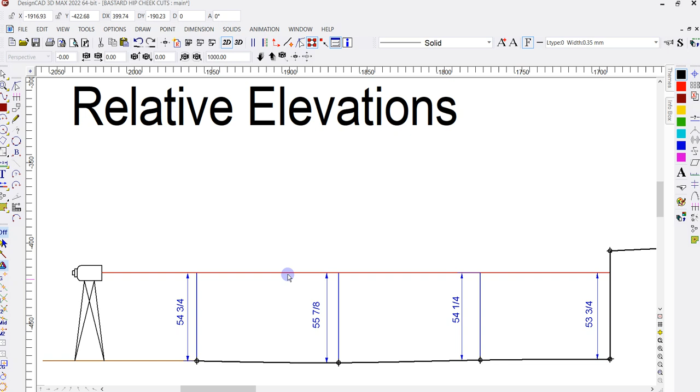And then at some point you're going to end up needing to go higher with your laser or your level. So there's the new, put your laser, the new laser, there's your new laser line.

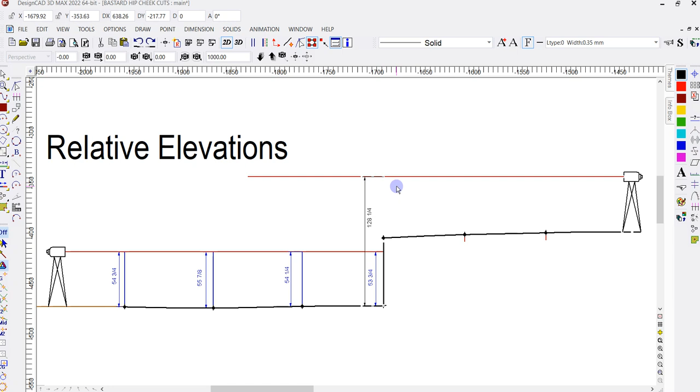So now what you need to do is tie in these points to these points, right? So what you're going to do is tie in the old laser elevation or this old point to the new laser line. So you're going to start measuring this one here. I should have left that line, but the 128.

So you're going to go from the new laser line all the way up. So now you've tied the new laser line into the old point.

So if you do the math, 128 and a quarter minus 53 and 3/4 will give you 74 and a half. And you want to tie that into another existing dimension and get that same number. That's how you're going to check to make sure you're not making a blunder.

And then pretty much it's rest. You just start taking those elevations as you go. And then you have relative, so all the points, you can look at the points relative to each other.

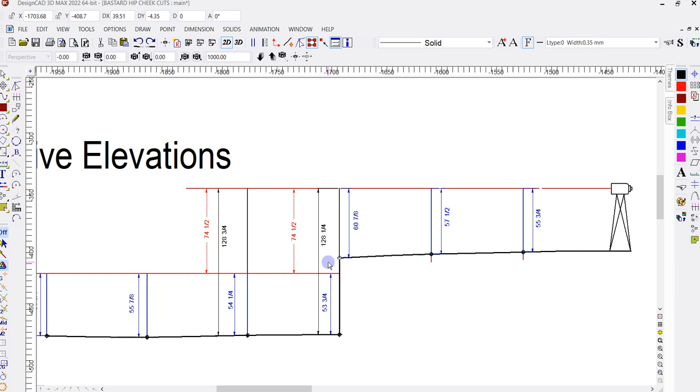This is easy to take back and draw or give to your detailer. But probably the most important thing here is getting those two numbers so that you don't make a mistake. And then that's about it.

So now that you have everything, these are relative to each other. And if you go up to 128 and a quarter minus the 60 and 7/8, that'll give you this dimension right here.

Right? So now you have relative from the lowest dimensions to the highest dimensions. So if you wanted to draw the lower level and then raise yourself up, then go from there, 60 and 7/8 coming over and then changing the elevation in regard to that one.

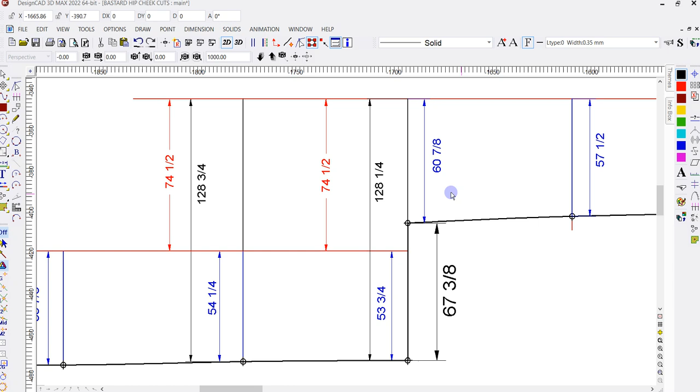Or you can go all the way up and then down in each one. And that's pretty much it. That's probably what I'd do if I was drawing this.

I would go all the way up, get your level line, come over to the point, and then do these lines down. So maybe not that. It wouldn't hurt to have that to check, but that's it.

I would call those relative elevations. If you are just taking elevations and all you needed to do is for one job and take some information, maybe take it back to the shop, that's probably how you'd want to do it.

You could use the same thing going up and down stairs, and very similar. You're going to have to pick it up and move it. You just want to make sure you're closing out, tying into something into one that you've done already, and then

using that same system to another point to make sure that you end up with the same distance between the laser lines, right? Those measurements come out, within a 1/16 of an inch or something, or depending on what you're doing, how accurate you want it.

And that's what I'll call relative elevations. I hope that helps you in your career.

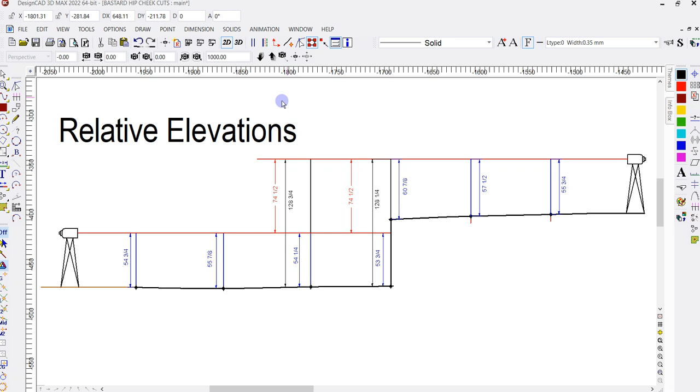This is pretty straightforward. Most everybody's done this, but making the jump with one elevation to another and maybe another, that's just the important part I thought I'd share. I hope that helps you in your career, and thanks for watching.